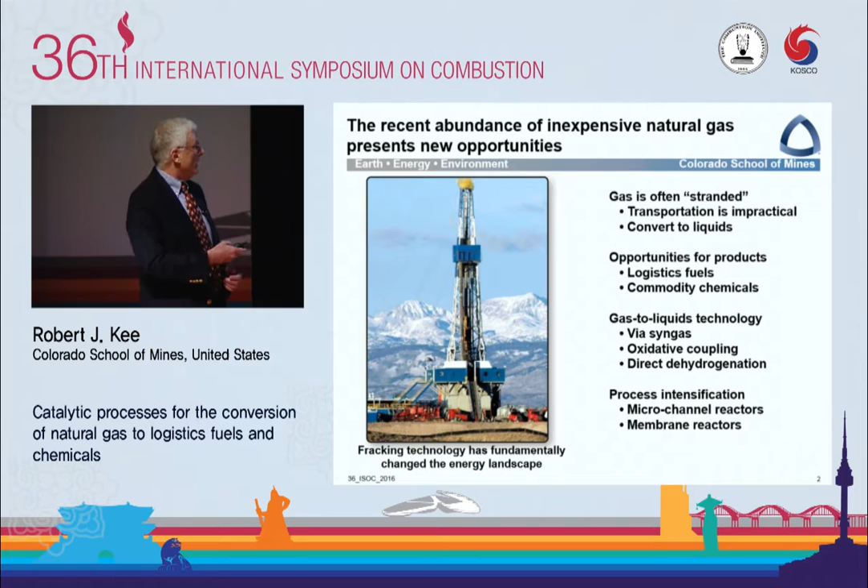As I started thinking about this talk, I wanted to set it in the context of what do we, as a combustion community, know well — actually very well compared to many other groups of engineers and scientists. I've listed a few here that I think everyone will agree with. I'm showing a relatively old picture of a turbulent flame from Godfrey Mungal's group some years ago.

This community is really very comfortable with chemical complexity — that's not always the case in other communities. Not only chemical complexity, but fluid mechanical complexity, coupled heat and mass transfer, advanced diagnostics, modeling and simulation, and the ability to scale from fundamental research to practical application. These are foundational things we're very good at as a community. Now, as I look to opportunities and things I'll talk about today, we need to build upon that foundation to extend, to do new things.

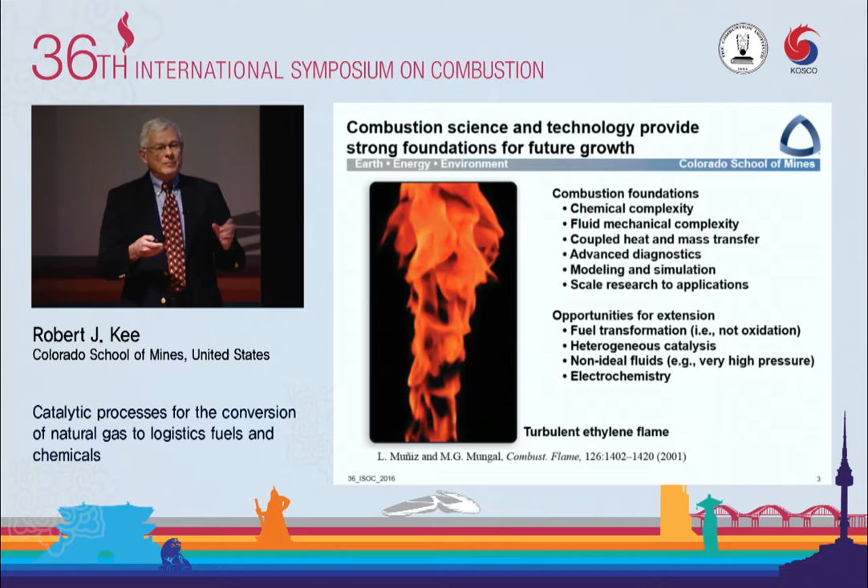So what I'll talk about today is mostly transforming fuels, not oxidizing them. They're still chemically complex, almost always operating on heterogeneous catalysis, but not always. Oftentimes we're working at high pressure, low temperature, very non-ideal fluids, supercritical sorts of behaviors. And a place I'm spending a lot of my own creative energies these days is in electrochemistry — I'll very briefly touch on that in this talk, but it's an important topic in its own right.

So here's the outline for the talk I'll give today. I'm assuming we'll start with clean natural gas — what I really mean by that is methane.

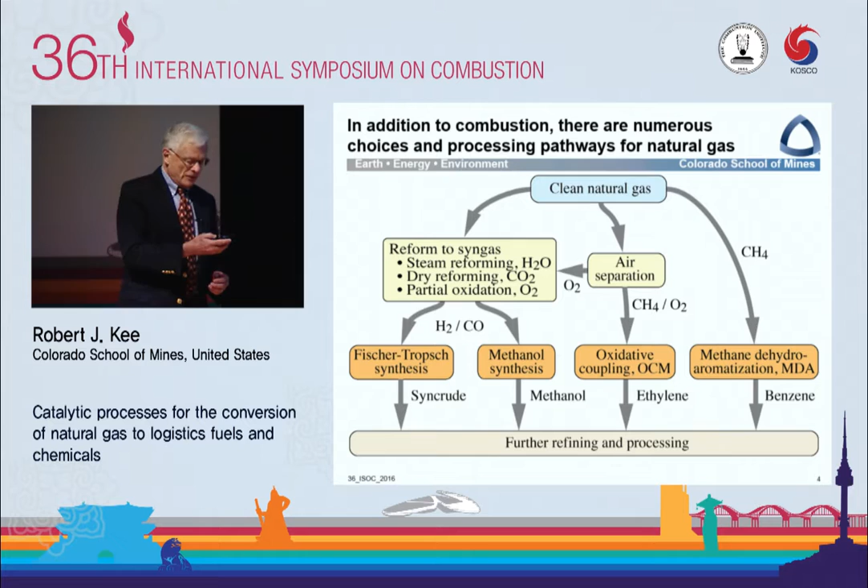There's a lot of technology to get from natural gas to methane before we go into other processing. I'll review what's largely familiar to this group about syngas, which is the most traditional way to move from methane to other fuels. I'll talk about Fischer-Tropsch in the context of process intensification. I won't say anything about methanol here, but I'll spend time on oxidative coupling and methane dehydroaromatization, leading ultimately to chemical feedstocks for downstream processing.

So let's start with syngas and reforming. I want to remind you of two important things. One is the heats of reaction—strongly endothermic for typical reforming, or reasonably exothermic for partial oxidation, with combinations that are autothermal. We're often thinking about how to manage temperature in reforming processes.

What's often less talked about is the need to produce certain hydrogen-CO ratios depending on your downstream process. For example, if you're going to a Fischer-Tropsch process, you need 2 hydrogens for every CO, but if you want to make acetic acid, you need equal parts. So attention to both process temperature, the exo-endothermicity of the chemistry, and product composition is quite important.

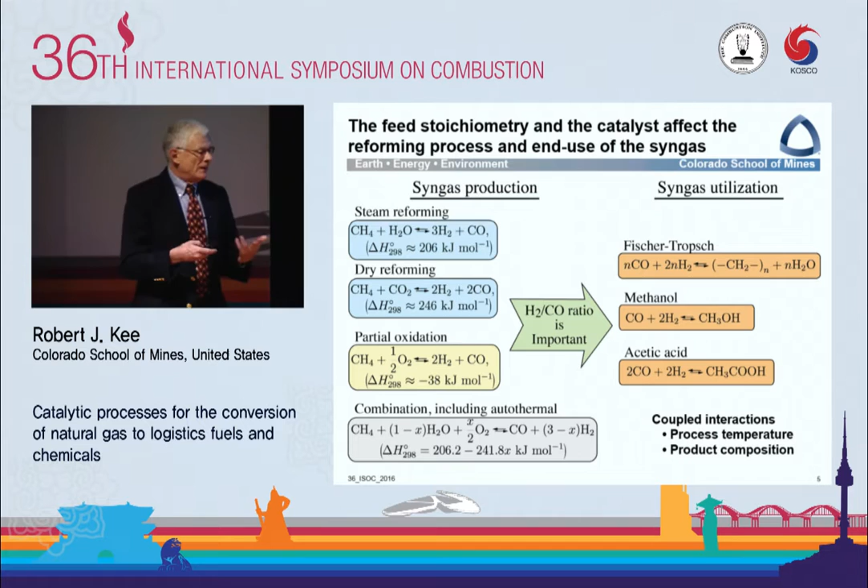One way to conceptualize that simply is shown in this ternary diagram, plotting the equilibrium reforming chemistry. There are a couple of important things shown here. One is this red line, the coke line—if we have a feed stream above this line, thermodynamically the most likely thing is to make coke or foul the catalyst, so usually we don't want to be there.

The star here—I should put an asterisk on that, because the plenary yesterday said we actually do want to be here. Anyway, the other thing shown here is iso-lines of the hydrogen-CO ratio. So as I said, depending on what you want to do with the syngas, you're concerned about coking, controlling temperature, and controlling the hydrogen-CO ratio.

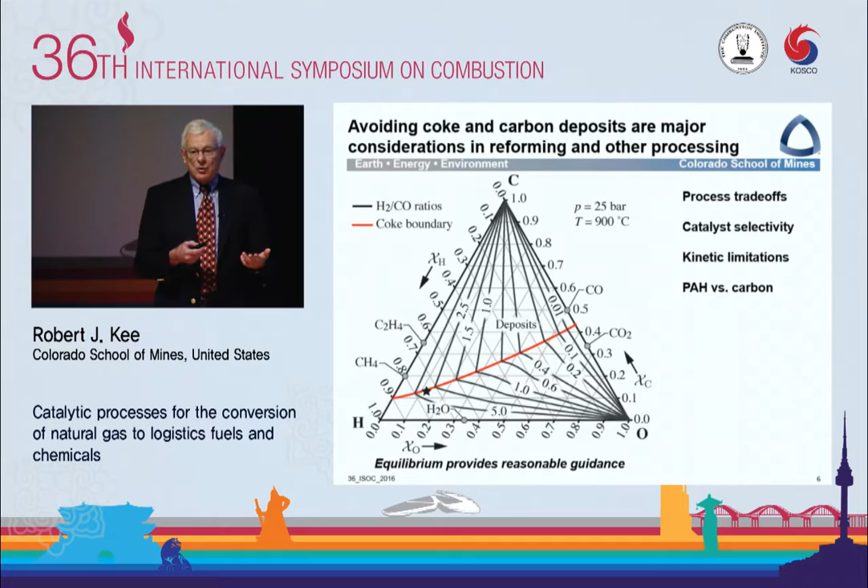Now this picture carries a lot of information, but it's at equilibrium. And as we well know, most processes are not equilibrated—we have kinetics to deal with.

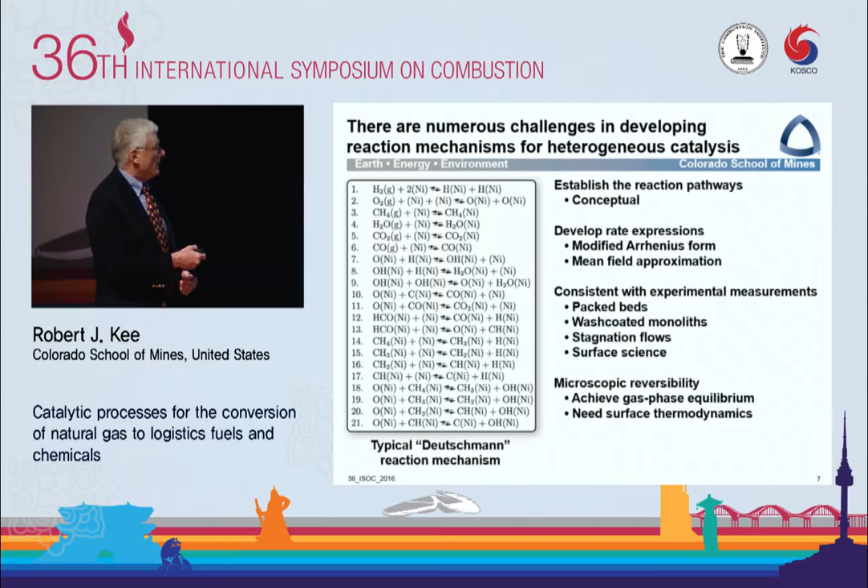I also want to call attention to a place where we need a lot of help: microscopic reversibility. In gas phase chemistry, we almost take it as given that we've got microscopically reversible reaction mechanisms, but in heterogeneous catalysis that's rarely done. The reason is you've got all these adsorbates on the surfaces, and we simply don't know the thermodynamics. So there's a lot of estimation needed, a lot of fundamental science needed to either measure—which is difficult—or predict by ab initio chemistry. I'll come back to these topics.

Okay, let me shift back to reforming. I showed a slide with autothermal reforming, dry reforming, and so on as global reactions. Here's what a typical steam reformer looks like at industrial scale. I want to call your attention to the size of a person—these are large reactors, typically producing millions of tons of hydrogen annually for ammonia synthesis, petroleum upgrading, and any number of things.

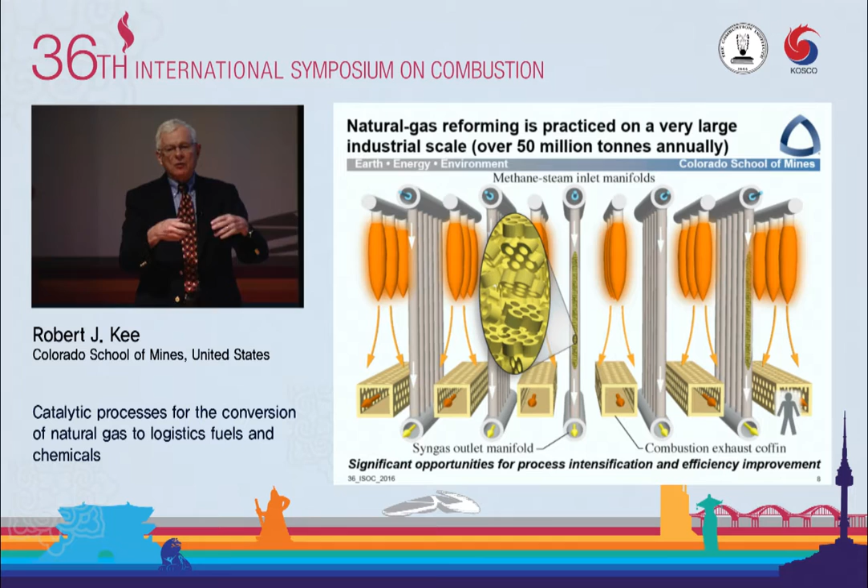Recall that steam reforming is strongly endothermic, so we need to produce heat. In this refinery reactor, we burn half of the methane simply to produce the heat. All other things being equal, that's inefficient—we burn to make the heat, to make the products we need. So we ask ourselves: can this be intensified in some way that makes that burning more efficient, or delivers the exotherms differently, rather than burning per se?

That's the spirit in which I want to talk about process intensification. In this talk, I'll discuss two broad ways to intensify. One is in microreactors—I'm holding a little ceramic reactor that I'll describe in a few minutes, including its internal structure and how it performs. The other is in membrane reactors, where we're spending a lot of time, mainly with ceramic ion transport membranes, to intensify with membranes.

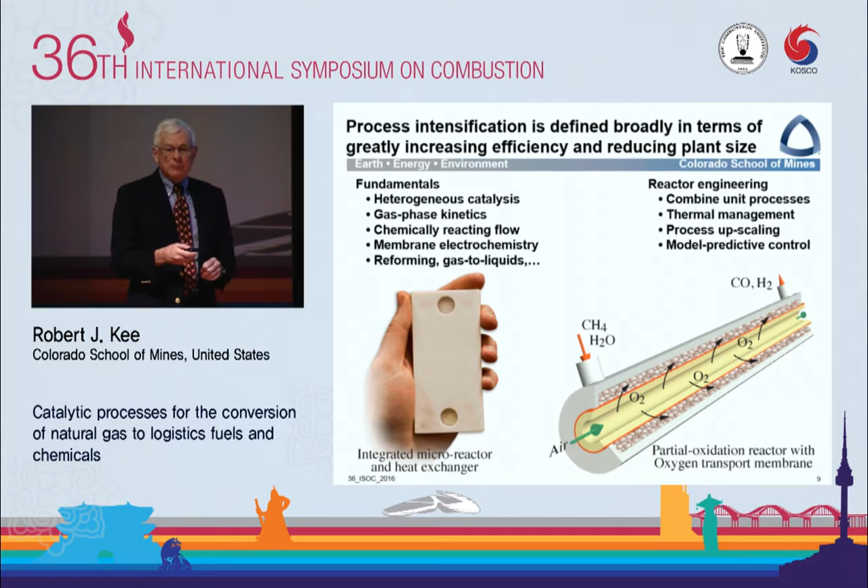In this illustration, I'm doing basically a partial oxidation, but introducing the oxygen through an oxygen transport membrane along the length of the reactor, rather than premixing at the front end. I'll talk about why that's useful as we go on.

Now, I showed a picture of a large refinery-scale reformer where I had large flames producing the heat to support the reforming endotherm. Here's one concept for integrating that in a microreactor, where microreactor means channels on the order of a millimeter or so, where we run two channels—one doing the endothermic reforming, the backing channel running an exothermic oxidation process.

So in principle, this works great. In practice, it works not quite so great, because it's very difficult to get the endotherms where you need them, the exotherms where you need them, and do the balancing and so on. But in principle, it's a good idea to closely couple exothermic and endothermic processes, as opposed to simply making a flame.

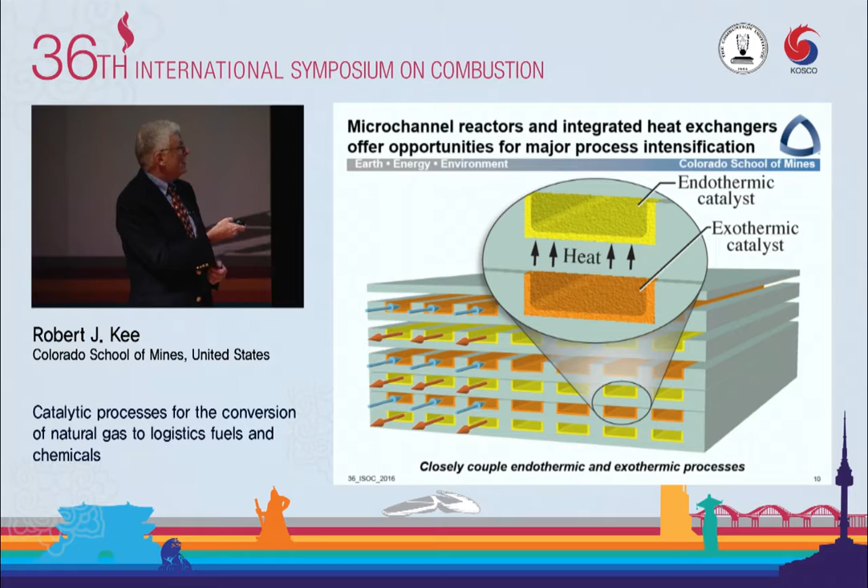Now let me take a short detour here. I've shown the catalyst as a wash coat, much like in your catalytic converter in your automobile, but you see no detail of what that looks like. So one of the things we've done recently is reconstruct the wash coats and look at the microscale of that wash coat structure.

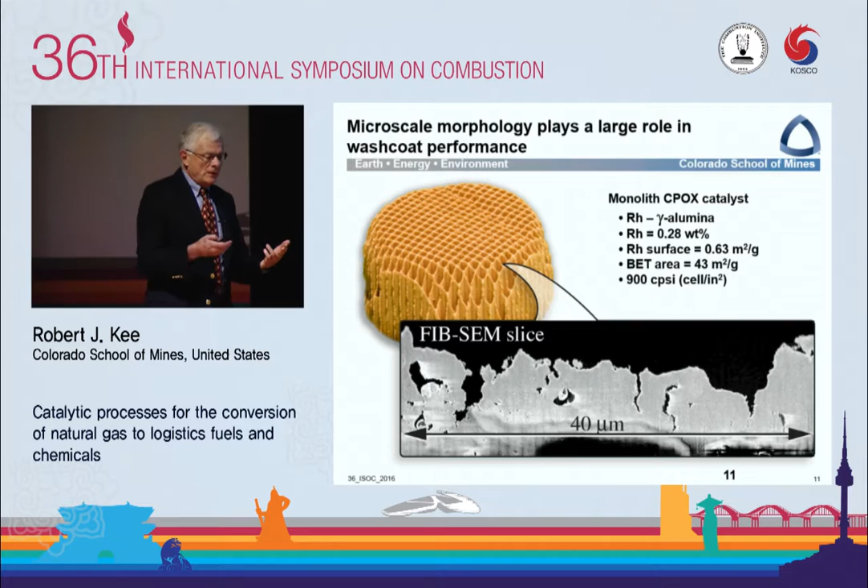This is a commercial partial oxidation catalyst that we acquired through the good graces of Olaf Deutschmann in Karlsruhe. This is a focused ion beam SEM—scanning electron microscopy—slice of a bit of this wash coat. With the FIB-SEM, we can now tomographically reconstruct the wash coat structure in whole.

So on the scale of a few tens of microns, this is what the tomographically reconstructed catalyst wash coat looks like. If you follow this literature, we often treat wash coats as collections of packed spheres or ordered holes, and come up with a Thiele modulus, this kind of thing. But when you look at the actual microstructure, you'd be hard-pressed to say that looks like a collection of packed spheres. It just doesn't.

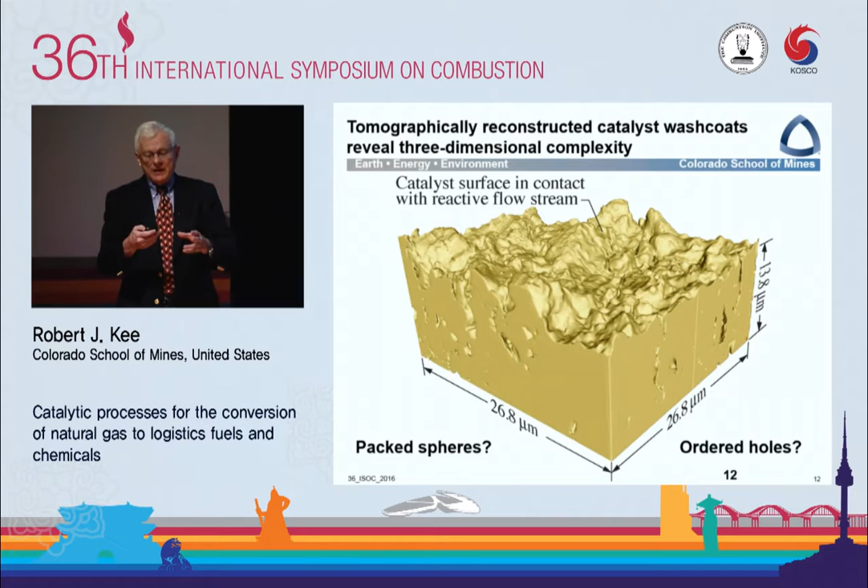So what we've done is go into these—let me call them cracks, these crevices that go into the wash coat structure—and pull those out electronically, which we can do because we have digital representations of the microstructure. From that, we do three-dimensional simulations of the reaction-diffusion trade-offs deep within these pores, or crevices.

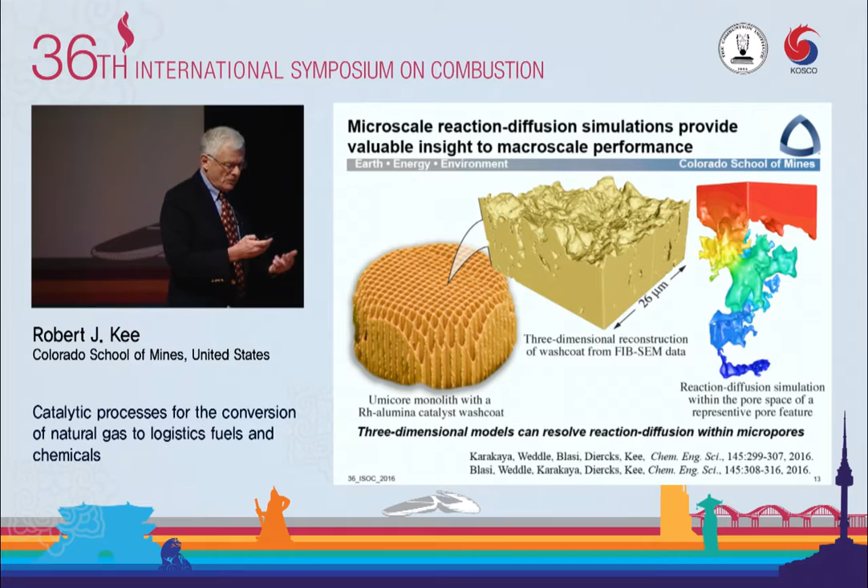In this case, we've generalized that in terms of a Damkohler number, looking at reaction-diffusion trade-offs. As you'd imagine, if the surface chemistry is slow compared to the diffusion, you get deep penetration into the cracks and use pretty much all your catalyst. If, on the other hand, the surface chemistry is fast, all the chemistry happens near the surface, and the platinum or rhodium or whatever you've put down there is actually not being used. These kinds of insights are quite important to how we optimize wash coat structures in actual catalysts.

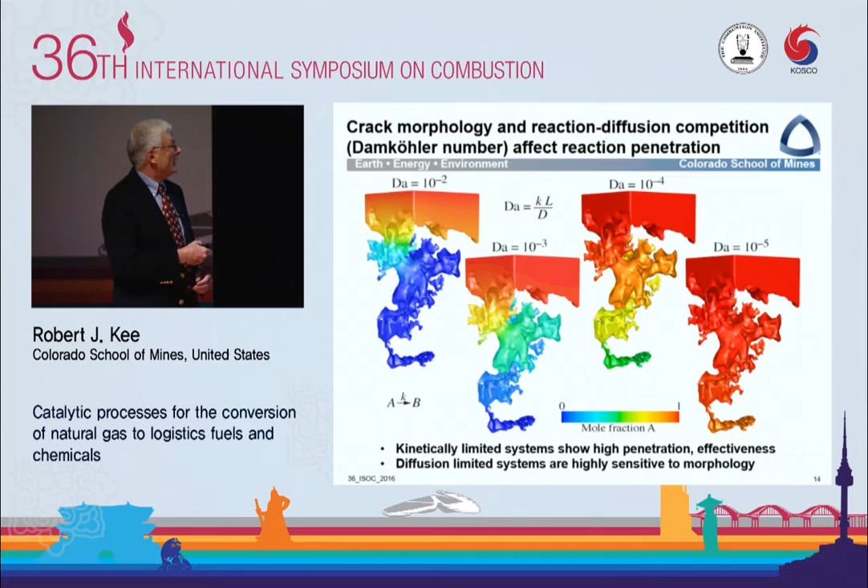Okay, let me come back to the microchannels, where in this case I haven't shown the catalyst explicitly. But as you know—there are many talks in this symposium this week about microchannel combustion and microchannel behaviors—you get very high heat and mass transfer because of the small dimensions. It's laminar flow, but very high heat and mass transfer because the Nusselt and Sherwood numbers are constant. As the length scales decrease, you get very high heat and mass transfer. So that's a good thing.

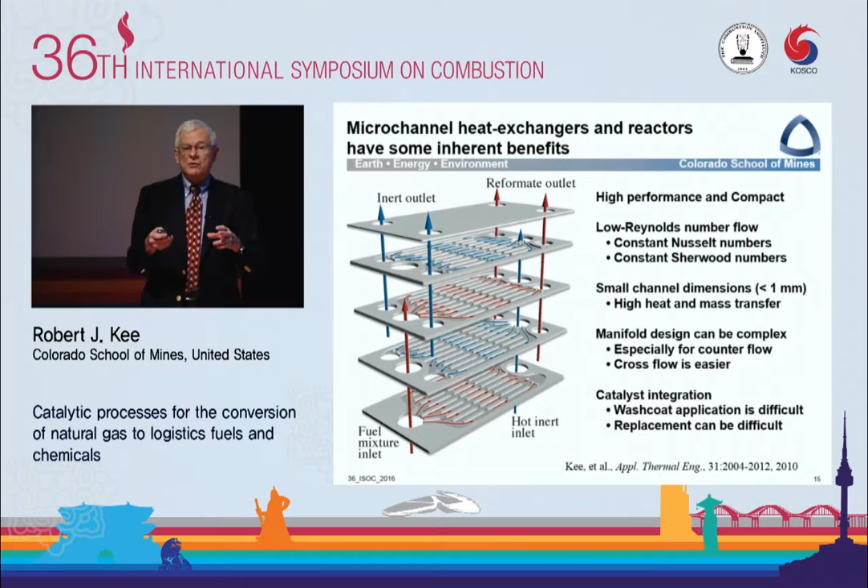So this is a reactor, and I'll show some brief results. We're making these from ceramics. Most of this technology is made from metals, which is a good thing, but we think we can get comparable performance at much lower cost with ceramics. But that's a bit of a different story.

What I'm showing here is that we've had to do some things in the design of these reactors. I'll call specific attention to these little pedestals that sit here, which fluid mechanically is actually quite a bad idea—I mean, you really wouldn't want to do that.

From a manufacturing point of view, we had to do it to get good lamination between layers. So not only do we need to be concerned with trade-offs between the chemistry, the fluid mechanics, the heat transfer, and so on, we need also to be concerned with design decisions that lead to manufacturability.

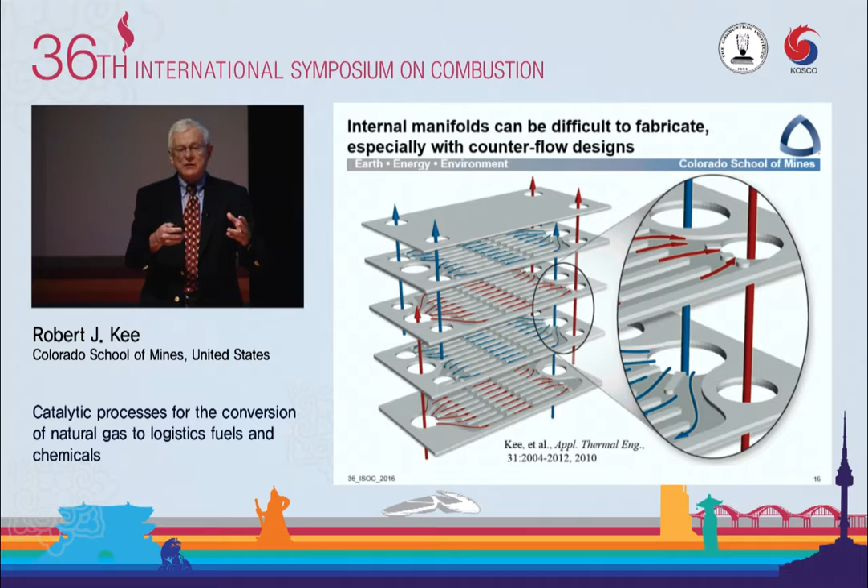So we spend a lot of effort in computational fluid mechanics dealing with heterogeneous catalysis, complexity in heterogeneous catalysis. I mean, certainly tens of reactions, typically not hundreds of reactions, fluid mechanics in the reactor bodies, and heat transfer. That's less computationally expensive than some of the DNS work done here, but it's still computationally very expensive.

We've spent a lot of time, and continue to, trying to accelerate these three-dimensional simulations. I call particular attention to recent work where we've taken the ideas from Steve Pope on ISAT, in situ adaptive tabulation, and implemented that into heterogeneous catalysis with very great accelerations. Once we've built the tables, we can solve the reacting flow problem basically at the same cost as the non-reacting flow. Very great accelerations.

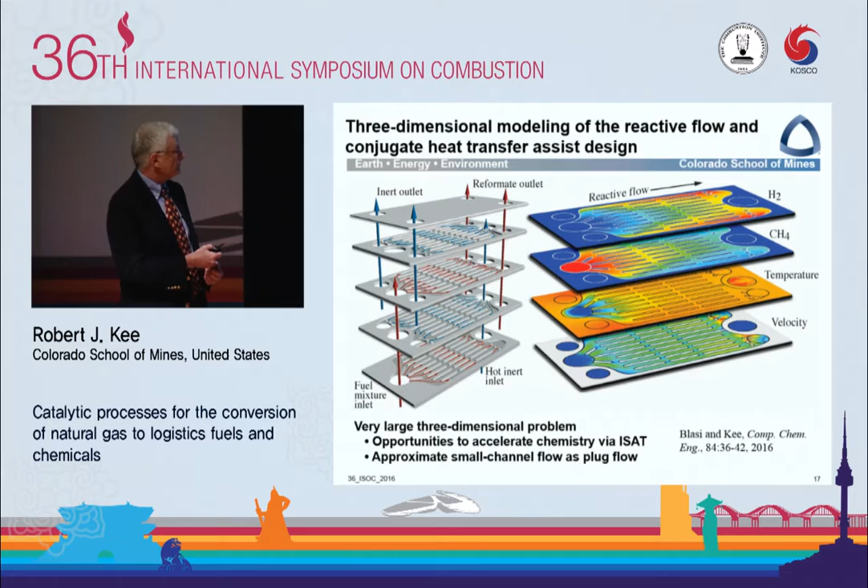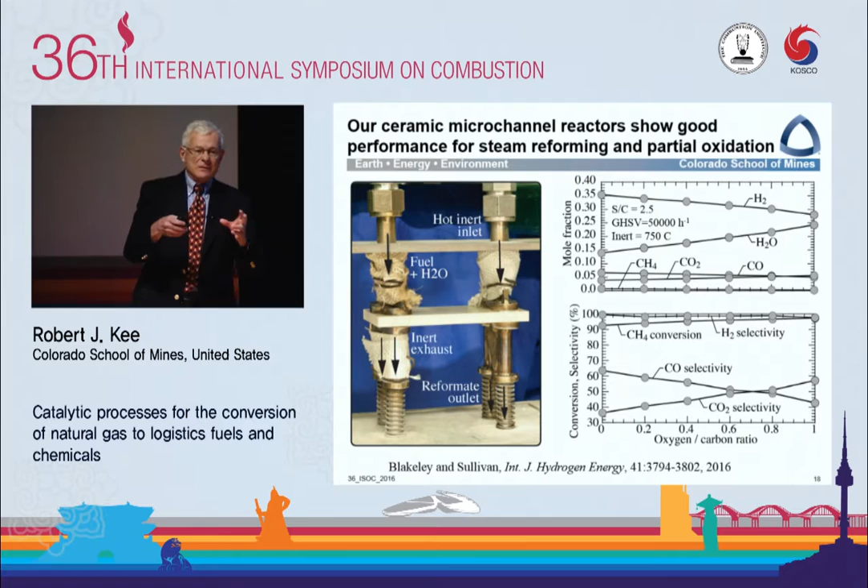Here's our reactor in a test stand, shown exposed here—normally there would be insulation around it. In this set of experiments, we're looking at the methane conversion and hydrogen selectivity as a function of oxygen-carbon ratios. We really care a lot about the oxygen-carbon ratios because we care about the chemical content of the syngas.

Okay, let me now shift our attention to membranes. Up to now, I showed a couple of reactors, but with no membranes. They were intensified by virtue of small channels, microreactors, and so on.

Look here at a typical steam reformer. Typically, we pre-mix the methane and steam beforehand. You produce a lot of hydrogen, but this reaction can equilibrate—all reactions equilibrate at some point. Once we've equilibrated, you can get no more conversion. So if we can pull out the hydrogen through a membrane, we can keep shifting this reaction to get further conversion of the methane. Palladium alloys are good hydrogen transport membranes. We work mainly on ceramic ion transport membranes, mainly of the barium zirconate, barium cerate class.

Here's basically the same configuration, catalyst in the interior body, but now let's look at a partial oxidation. If we pre-mix the methane and oxygen and feed it in, we'll get a very large exotherm right at the front end of the catalyst bed, producing a lot of total oxidation products, which will then downstream reform—inefficient if we can avoid it. So in this case, we're using oxygen ion transport membranes to introduce the oxygen just in time and thereby control the temperature. I'll show other examples of that as we go on.

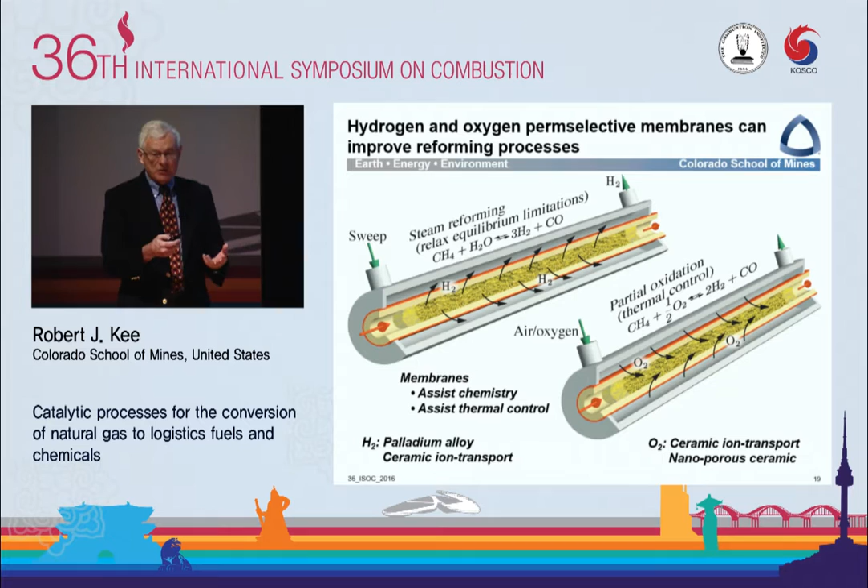In essentially all partial oxidation processes, you really want pure oxygen—you don't want to do a nitrogen separation later. So let me talk briefly about air separation, and that'll connect back into some of the membrane technology.

Here are oxygen transport membranes made mainly of things like calcium-doped lanthanum ferrite. These have been developed by Air Products primarily for oxy-combustion applications. When you look at this picture, unless you know what you're looking at, it just looks like a stack, like a loaf of bread. What is really going on?

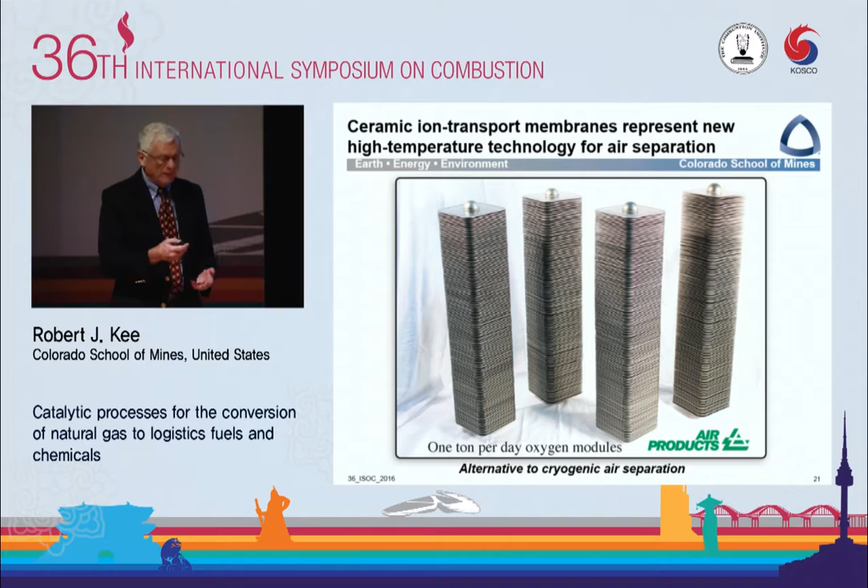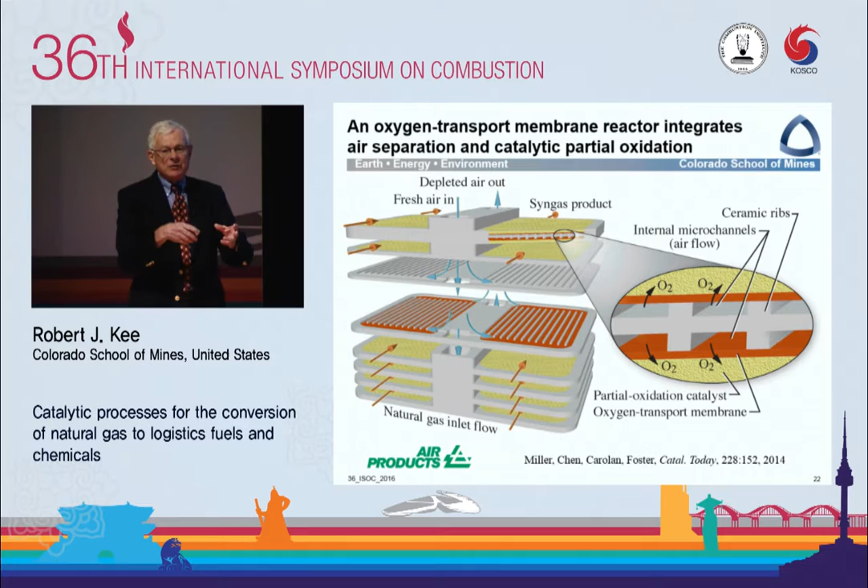In this image, I've split apart these blades, or slices of bread, to look internally, and then done one more thing—put a partial oxidation catalyst on the external surfaces of the blades. This is again a design from Air Products: they feed air through this whole stack, which goes through these small microchannels, separates the air, and produces oxygen through an ion transport membrane to the partial oxidation catalyst. So again, intensified in the sense of microchannels, in situ air separation, combining unit processes.

Here's another way this could be done. We're limited by our imagination in how to build these kinds of reactors, so I'm showing some illustrations—they exist and are worth thinking about. Here's a design that Praxair has developed.

In this case, we're coming in with steam and methane, which are fed to these endothermic reforming channels, filled with catalysts—that's endothermic. But the reaction is only partially reformed, so what comes out of these yellow-brown channels still has some methane. It comes over here and feeds partial oxidation tubes, which are complicated in their own right.

There's an oxygen reduction catalyst here, a membrane—an oxygen transport membrane—and a partial oxidation catalyst. That's exothermic, so those get red hot and radiate. Then air flows laterally across each of these blades, and there are many of those. So again, we've coupled the air separation process, a dry or steam reforming, and a partial oxidation in a way to produce syngas in a single reactor.

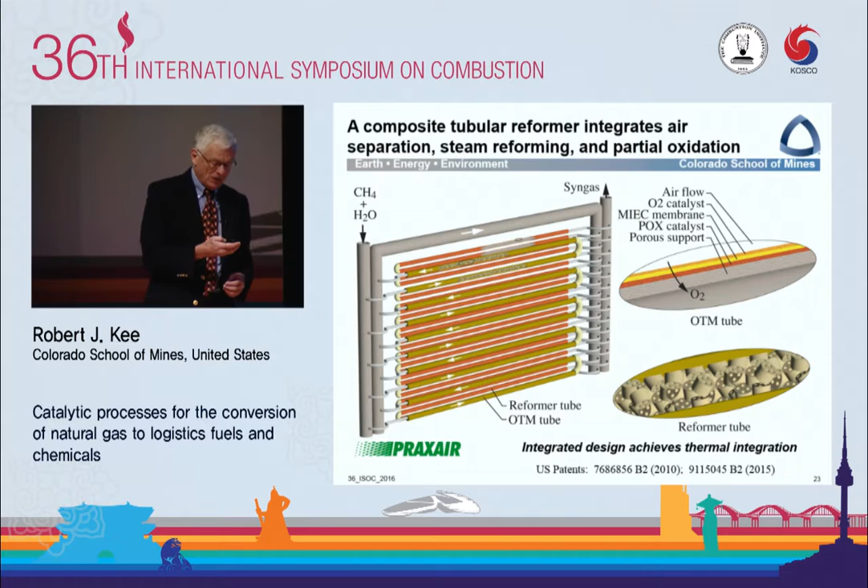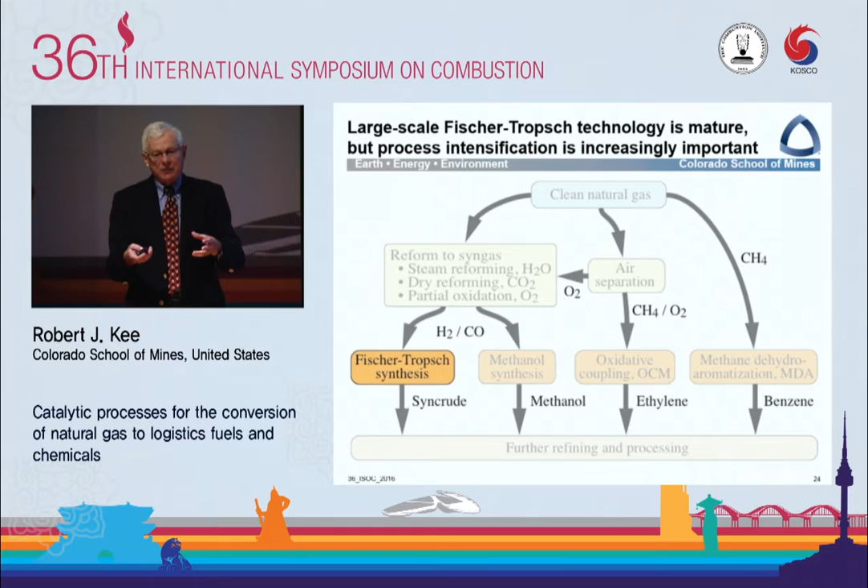Let me now turn our attention to what we can do with the syngas. There are many things we can do with it, but let's talk briefly about Fischer-Tropsch synthesis, the objective of which is to take the syngas and produce a synthetic crude, which would then go to further downstream refining.

In this technology, because the catalyst temperatures are low, 250 to 300 C, what happens is you bring in pressurized water, typically around 20 bar, and boil it. Because you can control the pressure, you can control the temperature, so you have very close coupling between the pressure and the operating temperature.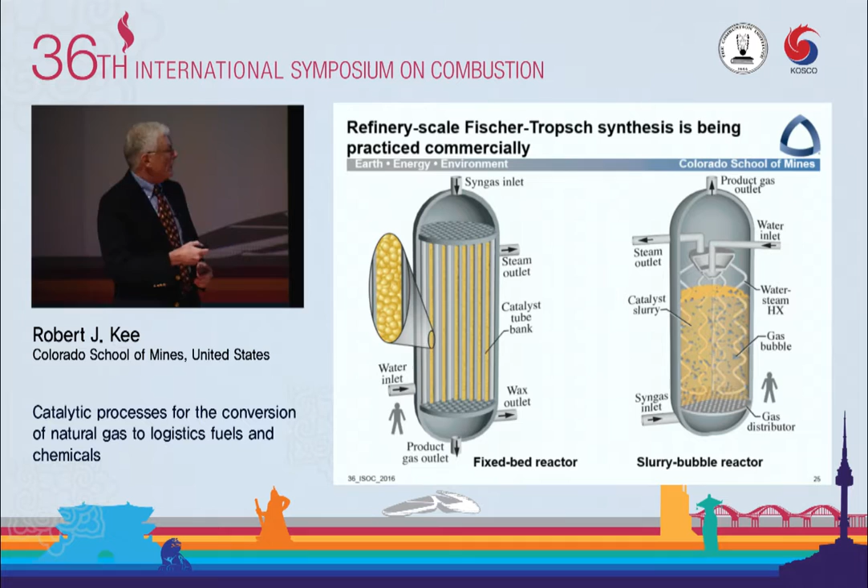But even so, these tubes are large, and so you have high temperature in the interior, low temperature on the exterior, and don't have as good a temperature uniformity as you would like. Slurry beds help a lot, but what I want to do now is call attention to what a company called Velocys is doing in their reformers and Fischer-Tropsch reactors.

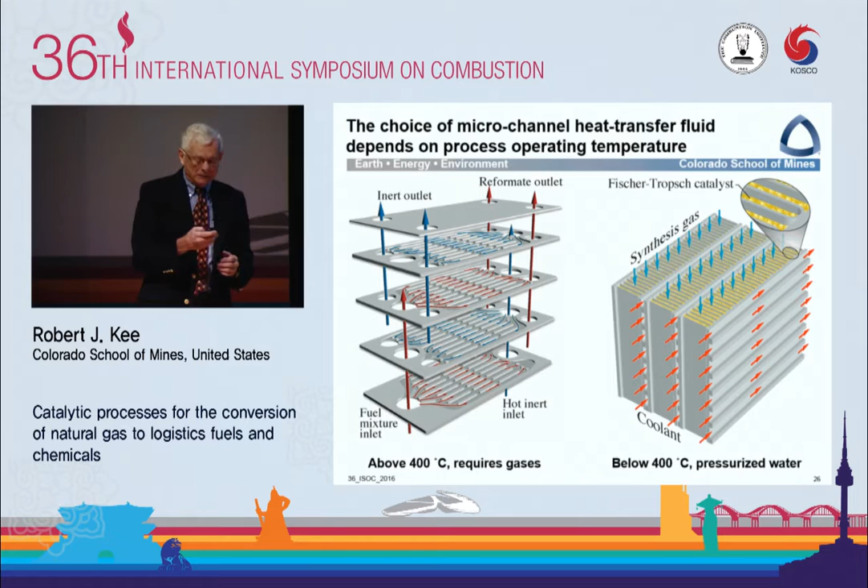Then we can take one of those cores and embed it into a meter-scale reactor, so again, highly intensified. In this case, syngas comes in the top, comes down through the catalyst, tightly coupled to the cooling water, the pressurized water, which is cross-flow. Steam comes out the top, condensed water comes out the bottom, and Fischer-Tropsch products come out the bottom.

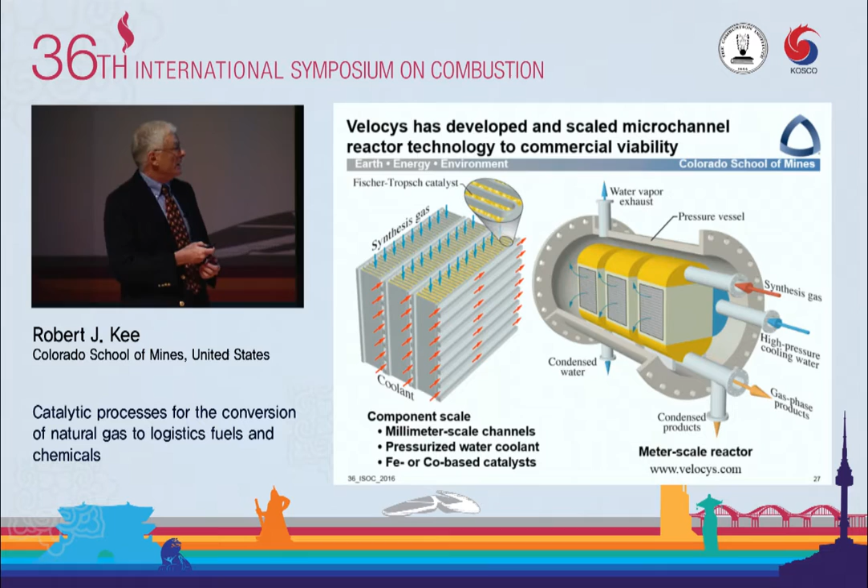So again, going from a very large refinery-scale reformer or Fischer-Tropsch reactor to something that's on the meter scale, again highly intensified. All right, let me shift gears to a slightly different topic: instead of reforming and Fischer-Tropsch, let's now try to do more direct conversion of methane to other products.

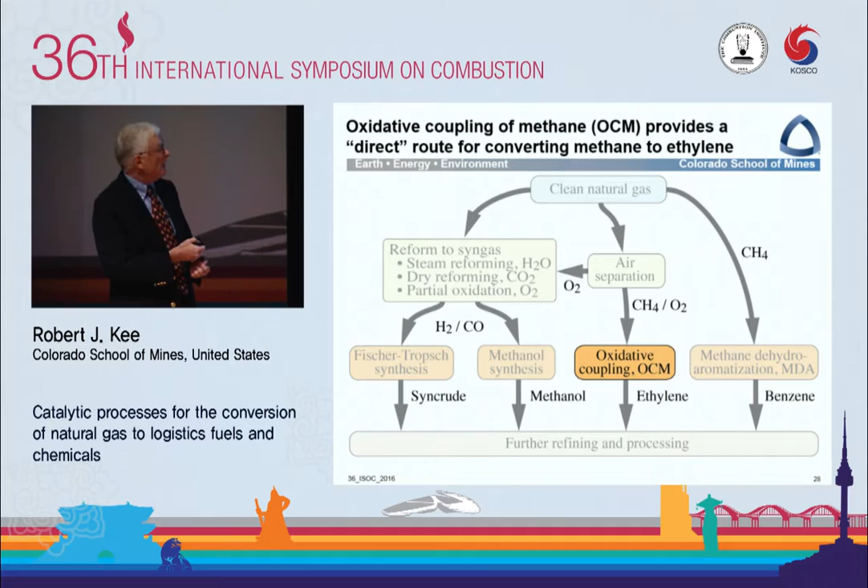I'll spend a few minutes talking about oxidative coupling of methane, a relatively old topic that has still not achieved commercial success. Here in cartoon form illustrates the oxidative coupling process.

We begin with methane and oxygen, with great excesses of methane. In other words, we're really trying to do a dehydrogenation, not an oxidation. But both on the catalyst surface and in the gas phase, the initial objective is to activate the methane to produce methyl. If we've got lots of methyls, they can recombine to ethane, and then subsequent dehydrogenation with the objective of producing ethylene, which is a very large commodity chemical with great value.

This process was first put forward in 1982, with a lot of work up till now. A company called Siluria, in the California Bay Area, says they have either commercialized or are very close to commercializing this process.

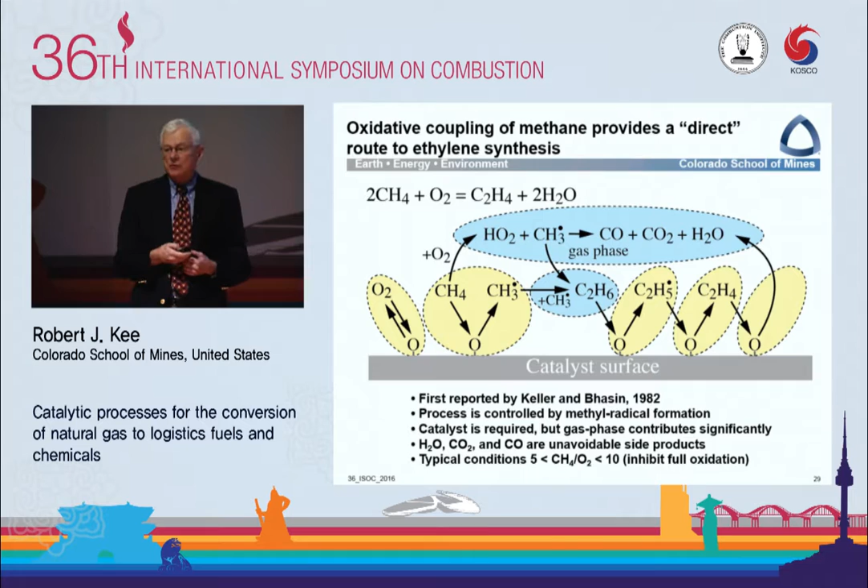Anyway, with oxidative coupling in mind, I want to come back to the catalyst. I showed a nickel reforming mechanism from Olaf Deutschmann, and this community is reasonably comfortable with rhodium, platinum, nickel single-metal catalysts. Those are very valuable and used quite widely, but not in processes such as this one.

In oxidative coupling, there are really two choices being pretty actively pursued: one is a sodium tungstate silica catalyst, where the silica is in a cristobalite form, or a lanthanum oxide, typically doped with ceria or calcia. Just by looking at the pictures, it's obvious these are more complicated catalysts than a 1,1,1 surface of rhodium or something like that.

In this literature, almost all the modeling uses a reaction mechanism coming from a group in Germany. But notice that despite these being complicated catalysts, the only species in this reaction mechanism are gas phase - there are no surface adsorbates at all. It's all gas phase. So when you look at the rate expressions for these reactions, they don't look at all like mass action kinetics. They're very complicated empirical relationships developed to predict measurements, but are highly empirical.

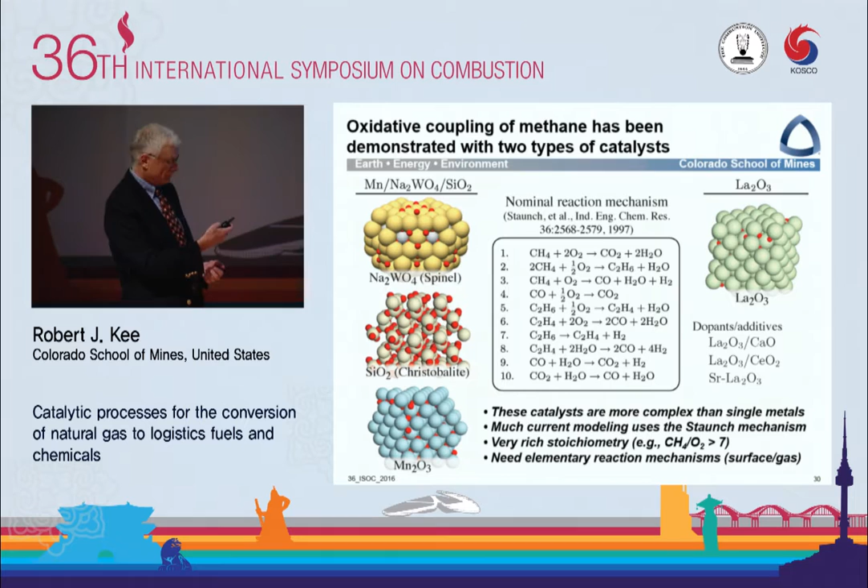The oxidative coupling is exothermic, but if you let the exotherm run and go to high temperature, then you make too many total oxidation products, and it's an inefficient process. So we're quite concerned with controlling the temperature.

Here's a reactor coming in with methane and oxygen onto the catalyst bed. This is work from Selim Senkan at UCLA. Some of the older among us may remember Selim Senkan was actually active in this community many years ago and then took a detour into catalysis and never came back.

What he measures with movable probes within this reactor bed is, first of all, a very strong exotherm within a few millimeters. So you put methane and oxygen onto this catalyst, it burns, for lack of a better word. You don't want that to happen. You really want the temperature to be low and thereby prefer the desired product, which is ethylene.

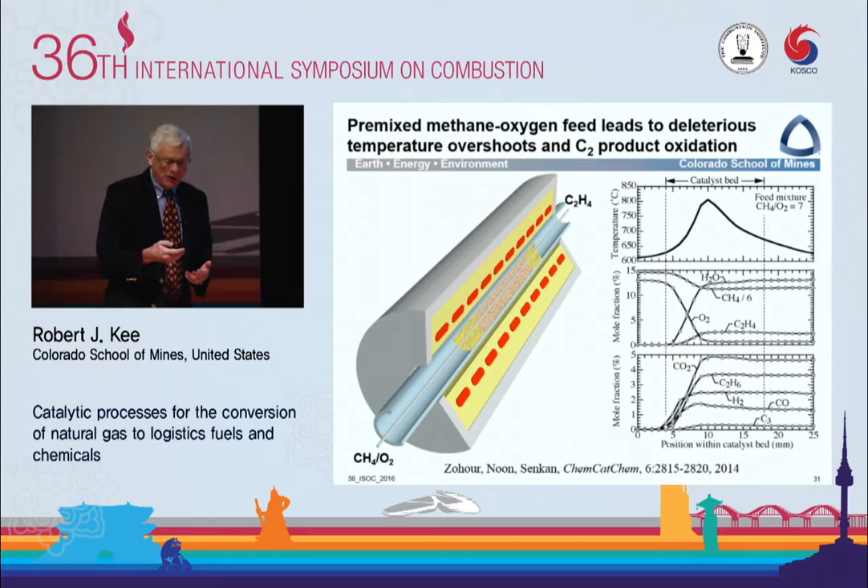So one of the things Selim did is say, okay, why put all the oxygen in at the first place? Let's make a two-stage catalyst. We put some of the oxygen in at the outset, and then we inject some later. And what you get is two peaks, but less exotherm than if it was all mixed in the first place.

Well, then it begs the question, how about 3, 5? How about making a membrane? Okay, so we'll go there in a minute.

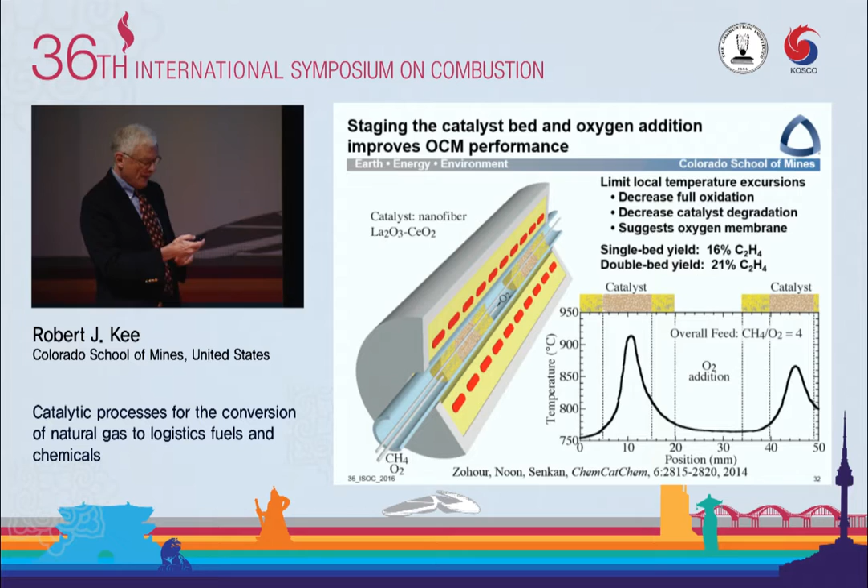But with these kinds of things in mind, here's a different kind of reactor that has been put forward by the group of Guy Marin at the University of Ghent in Belgium, coupled with a German group in Berlin. The wiring diagram here takes a minute to get your arms around, but let's break the catalyst into two reacting streams. So here's the oxidative coupling reactor, which remember is exothermic.

But we need to provide some way to cool that. We need to keep that cool, or the product streams to be cool. So let's run another process, which is a dry reformer, which is now endothermic. And in between these two processes, where the process streams never mix, we only exchange heat between the two process streams, we have a microchannel heat exchanger.

So the gas comes out of this reactor a little bit hot, goes through this counterflow heat exchanger, and heats the reaction stream going into the dry reformer, which is now going to cool. And then do it again, and do it again.

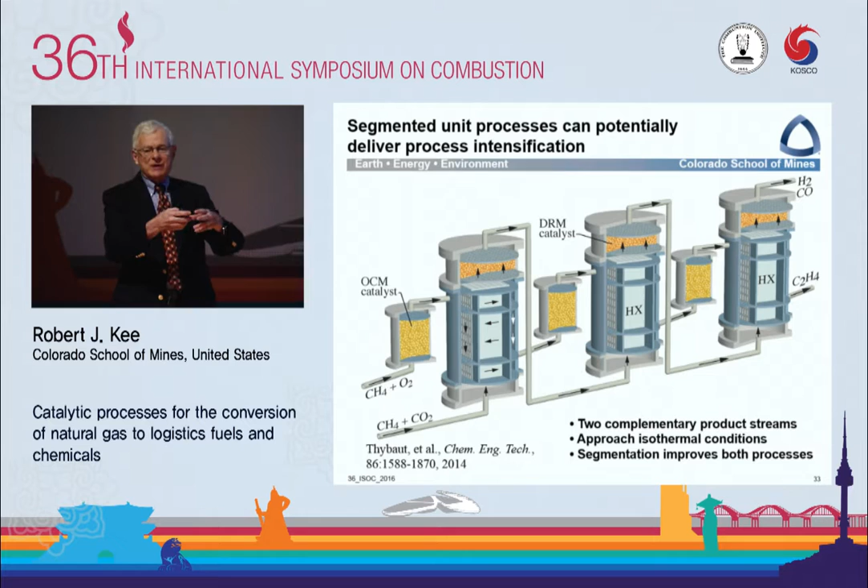So can we combine processes? That gives me two valuable product streams. Now, by many definitions of process intensification, you would say, wait a minute, that didn't combine unit processes. I actually made lots of unit processes. So on the face of it, you think, well, maybe that's not a good idea. I think it is a good idea. But then I think, do we have precedents for that, for expanding unit processes?

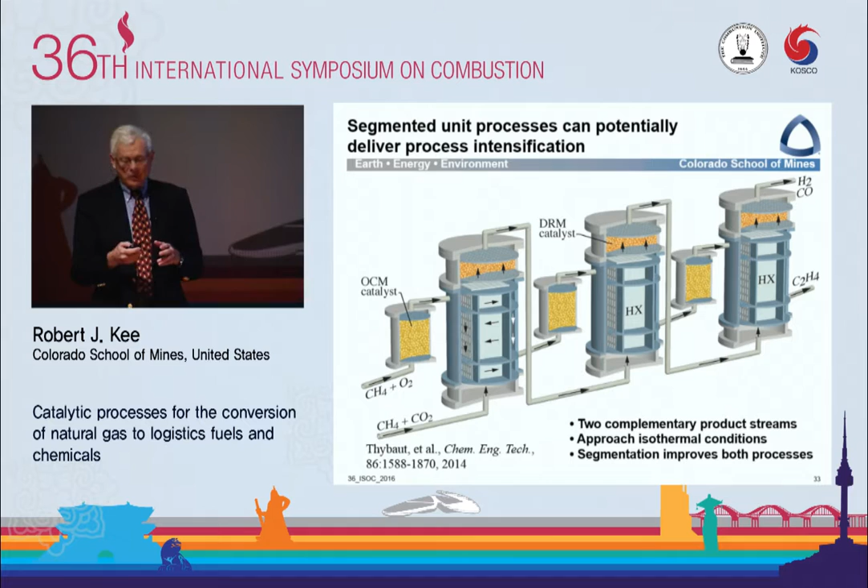And actually, in combustion, I expect this to be quite familiar here, but in gas turbines, it's actually efficient to have intercooling between compressor stages and make-up heat or reheat combustors between expansion stages. The reason to do that is to turn what would initially be a Brayton cycle into an Ericsson cycle. And if I do this with many stages, we'll get a sawtooth behavior that makes the compression and the expansion look more or less isothermal.

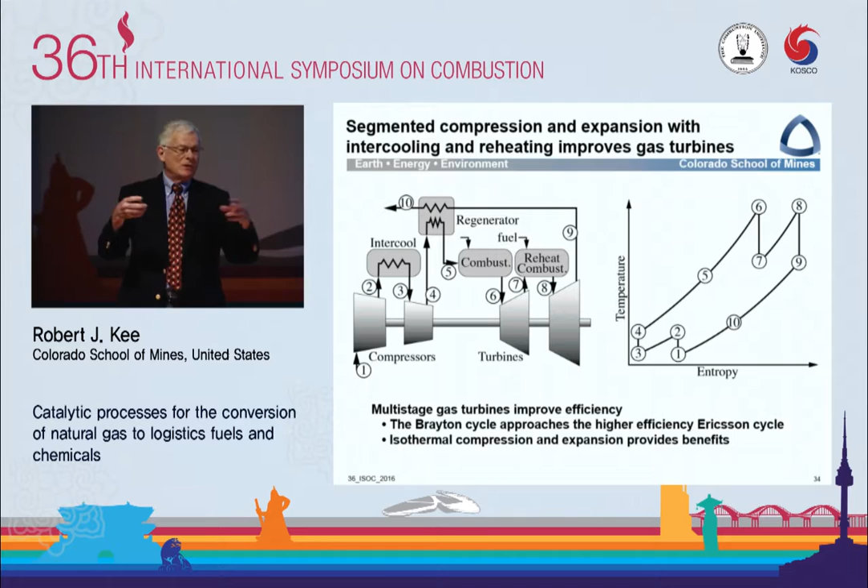So it's only an illustration to say that process intensification doesn't necessarily mean combining unit processes. There may be reasons to expand unit processes if we do it in an intelligent way.

Let me give another example, again, will be very familiar in combustion. Everybody's very, I mean, there's certainly not a single person in this room that's not quite familiar with opposed flow flames of various sorts. Here's just a cartoon image that shows, despite the fact that we have a two-dimensional flow field, the temperature and composition fields are flat.

Here I've taken a photo from Kal Seshadri's lab just to show that, in fact, that's what happens if you set it up correctly.

I've shown lots of examples of tubes with catalysts in the tubes and flow through the tubes. So what I'm showing here is a tubular flame coming from the group of Satoru Ishizuka in Hiroshima, and actually this image was taken by Professor Balushi, who's also in this meeting today. By analogy with the flatness of this flat flame, in the tubular flame, even though we have long axial tubes, the flame radius is independent of axial position, if you set it up correctly, and that can be done.

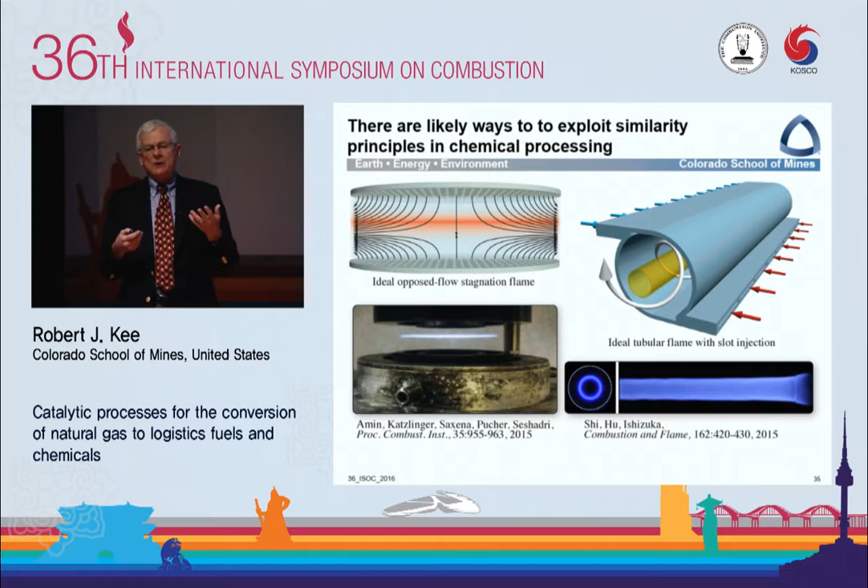So it comes to my mind, can we use that concept to build a reactor? Here's a notional image, which has not been built, might work, might not work, but at least it's interesting, where instead of having flow along the catalyst bed, where I can have exotherms, endotherms, things change along the length of the bed, if I make a reactor like this, I can do a number of things at once.

One is, let's put air in a central body, an oxygen transport membrane that delivers only oxygen, leaving the nitrogen here, onto the catalyst bed, and then swirl in the methane on the outside.

So if we could build this reactor, what we could say for sure, because we understand the mathematics of the similarity, is right the way along the length of this tube, everything will happen the same, independent of the axial position. That's a good thing. Now, we have to design it in such a way that the right thing happens independent of the length. But this is a very, very different concept that, as far as I know, nobody's even thinking about in the reactor engineering community, and might even work.

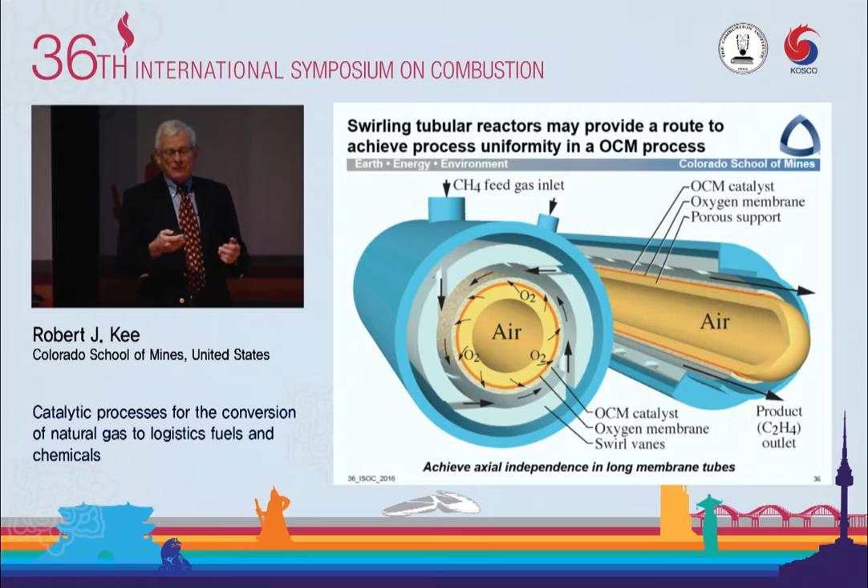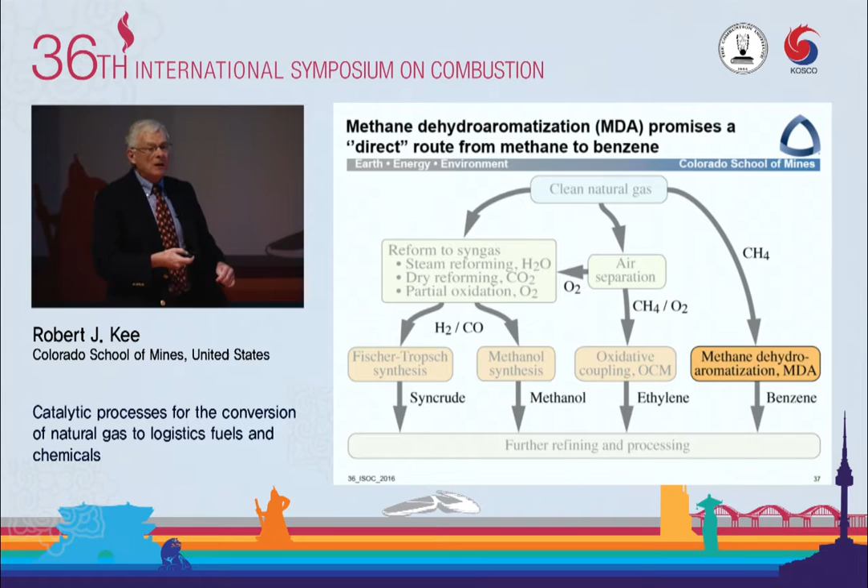Okay, let me close with a few comments about methane dehydroaromatization. In this process, in MDA, our objective is to directly dehydrogenate methane to produce benzene and hydrogen. And of course, we can easily write this reaction down and balance it and hope that it actually works.

The problem is, and I'll say more about this in just a minute, even though I can write this reaction down, the thermodynamics actually doesn't want to do this. It wants to make benzene, but then it wants to continue molecular weight growth to naphthalene, anthracene, and so on, which is what we don't want. So we need a way to interrupt that.

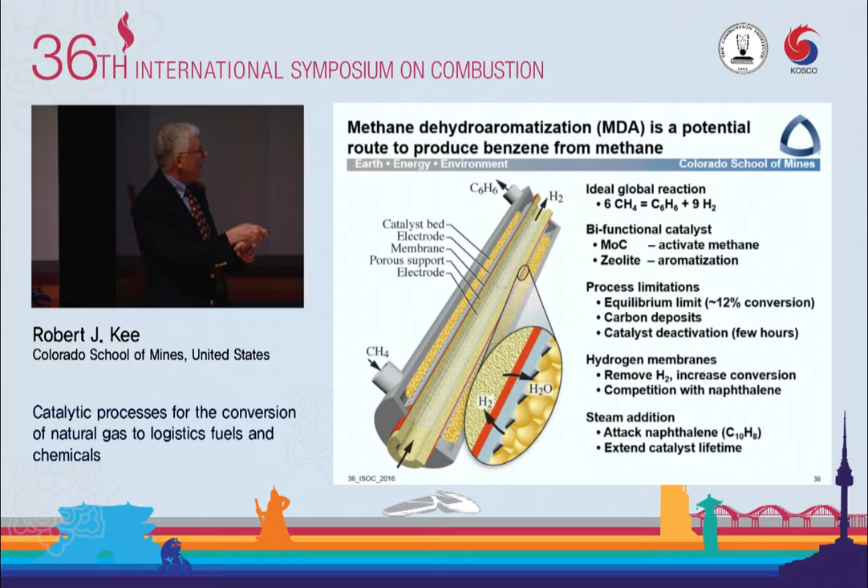One of the ways to do that, that's actually quite active in our group now, is to use low levels of steam to preferentially attack the naphthalene, and we're doing that through mixed conductor membranes. Again, these are solid solutions of barium zirconates, barium cerates that have the property that they can move oxygen ions and protons. So by polarizing this membrane, we can move hydrogen in one direction and essentially move steam in the other direction.

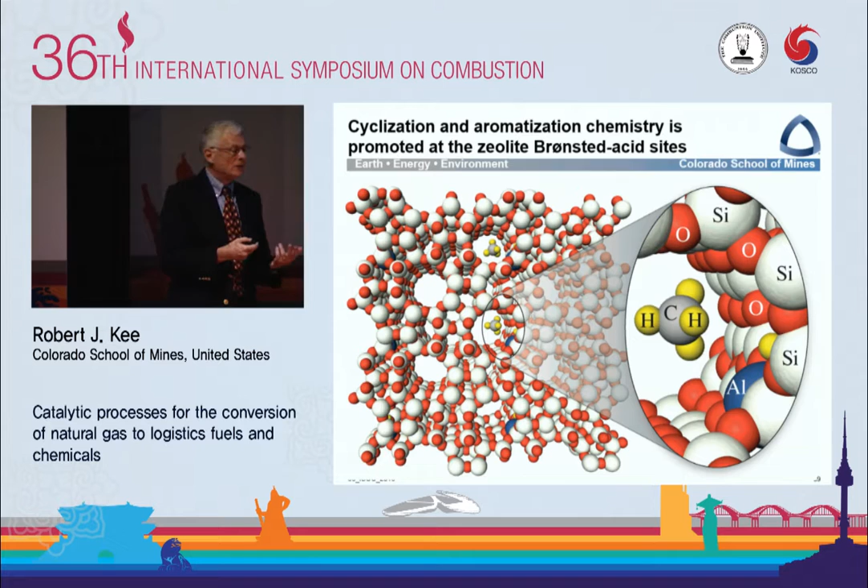Okay, now how do we get a reaction mechanism? I said at the outset, the easiest thing to do is click on detchem.com, and then it just appears. But I just say that tongue-in-cheek. That works if you want to look at catalysis on rhodium or nickel or something like that. But if you want to look at a bifunctional molybdenum carbide zeolite, there's no place to click and get it. You have to figure it out. And so we're working hard on that.

And when I say we, that means my colleague Canan Karakaya, who by the way was a student with Olaf, so that actually is connected to build these mechanisms.

So the first place you start is with a mind's eye picture. And this mind's eye picture was published a couple of years ago by the group of Guy Marin, I mentioned earlier, from Ghent. They laid it out in a notional picture: we're going to activate the methane on the molybdenum carbide, transfer some of the ethylene onto the zeolite, undergo a series of oligomerization reactions, protonation, deprotonation, ultimately cyclize into cyclohexane, protonation, deprotonation to make benzene.

Now we want to stop here. I mean, we want benzene as a product, but the thermodynamics doesn't want to stop here. The thermodynamics wants to go on and make naphthalene and anthracene and higher aromatics.

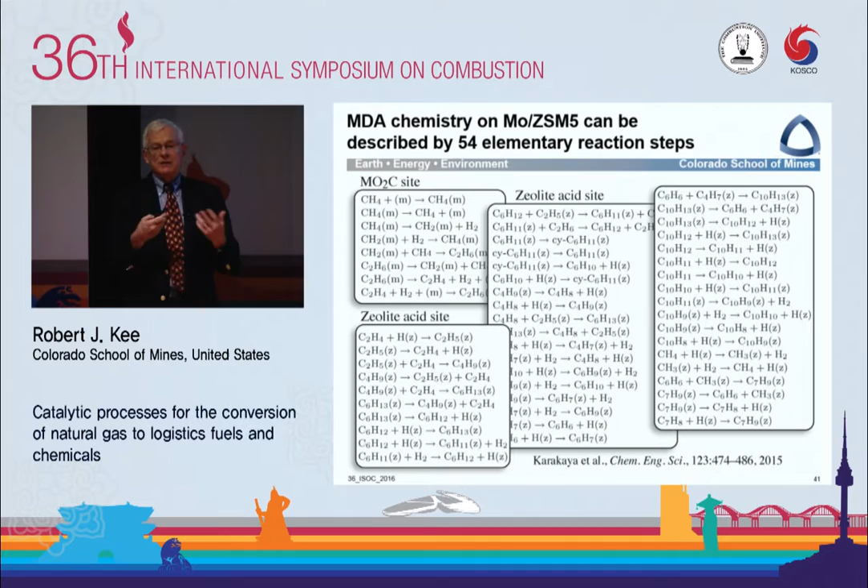Coming up with rate expressions is difficult. We've got to respect thermodynamics. We've got to be consistent with experiments, which we're doing. We're working a lot with the University of Oslo chemistry department who are doing experiments. So there's a lot of day-to-day iteration to come up with a reaction mechanism that represents what we can actually measure in the laboratory.

Yeah, I alluded to this a few minutes ago. What happens through these membranes as you take more and more hydrogen off the catalyst, well, if you start with methane and remove all the hydrogen, that's obvious what you get. You get carbon, right? I mean, that's obvious. But in fact, you don't go all the way to carbon typically.

And as you remove more and more hydrogen, then the naphthalene yield competes with the desired benzene yield. We continue converting, but to the wrong products.

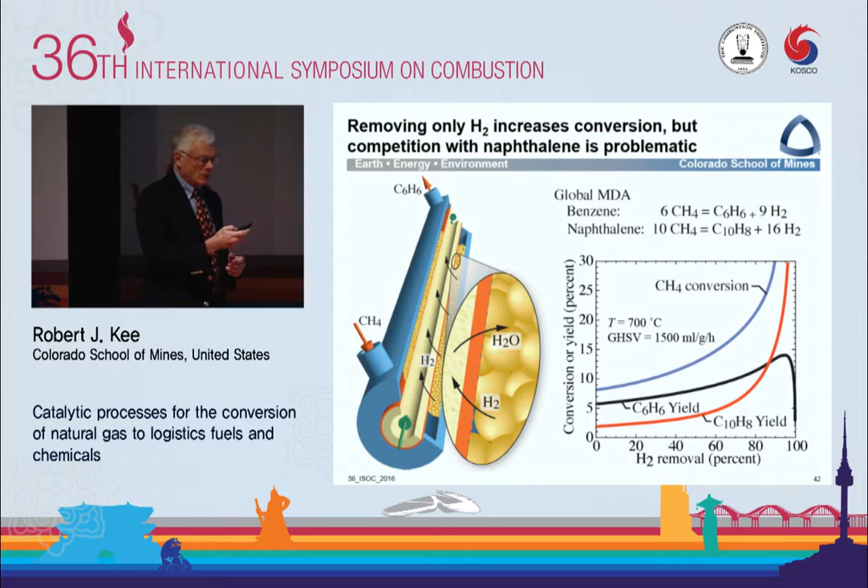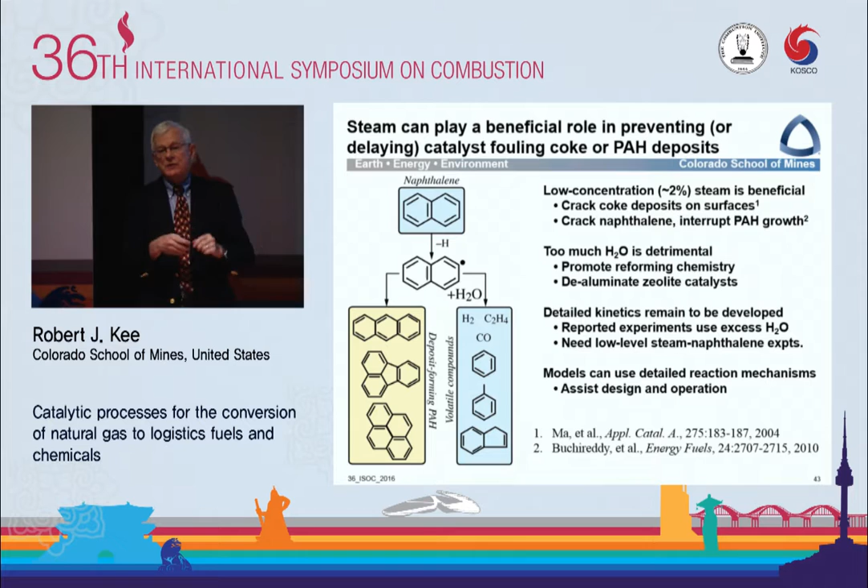So the thing that we're working on actually quite actively now is the chemistry, again, on these zeolite, these molybdenum carbide zeolite catalysts, but the ability of a little bit of steam, not a lot, 2% steam, to preferentially attack the naphthalene and come back to ethylene and other smaller products. That concept in itself is not new in the chemical processing literature, but the ability to do this with catalysts, with membranes that can move protons and oxygen ions, is in fact new.

Okay, I want to close here with a few very quick comments about membranes, which I've mentioned in a number of contexts. I showed this image earlier, but in this case, I need a hydrogen transport membrane. Typically, that's a palladium or palladium alloy or a proton-conducting ceramic, usually a doped perovskite, barium cerate kind of material. For oxygen transport membranes, we've got more choices.

Many of you who work on solid oxide fuel cells know very well that yttrium-doped zirconia is a good oxygen transport membrane. Doped ceria is as well. But those need to be polarized. In other words, you need electrodes to drive the ions.

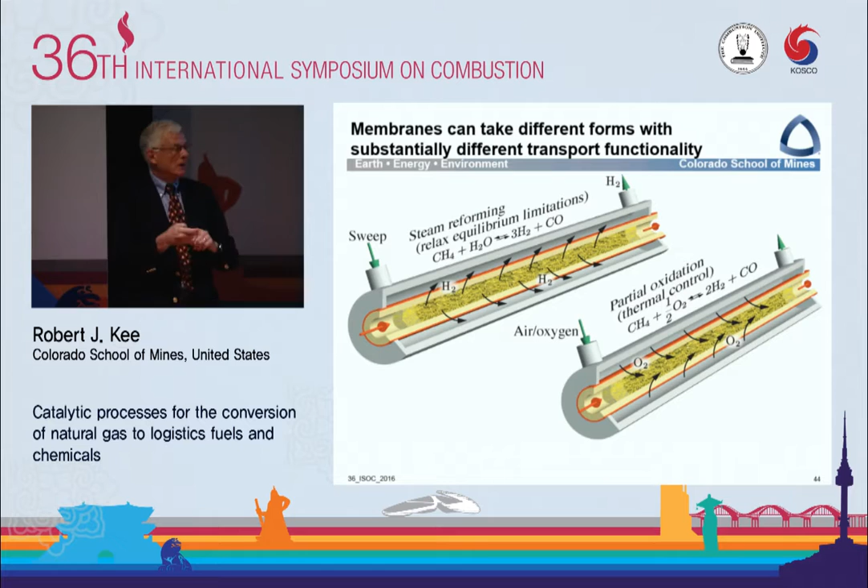Doped ceria has two mobile defects. One is the oxygen ion, and the other is a reduced ceria. It's not electronically conductive, so to move the ions, you have to polarize it. That also means you can make a fuel cell, and people do make fuel cells out of ceria electrolytes.

Yttrium-stabilized zirconia, again, that's much more known in this community because of solid oxide fuel cell technology. It's essentially a pure oxygen ion conductor. In oxidative coupling, there's a fair bit of work using nanoporous alumina. Now, that's not perm-selective, but if you can control partial pressures, these can be effective, and they're cheap. So there's trade-offs there.

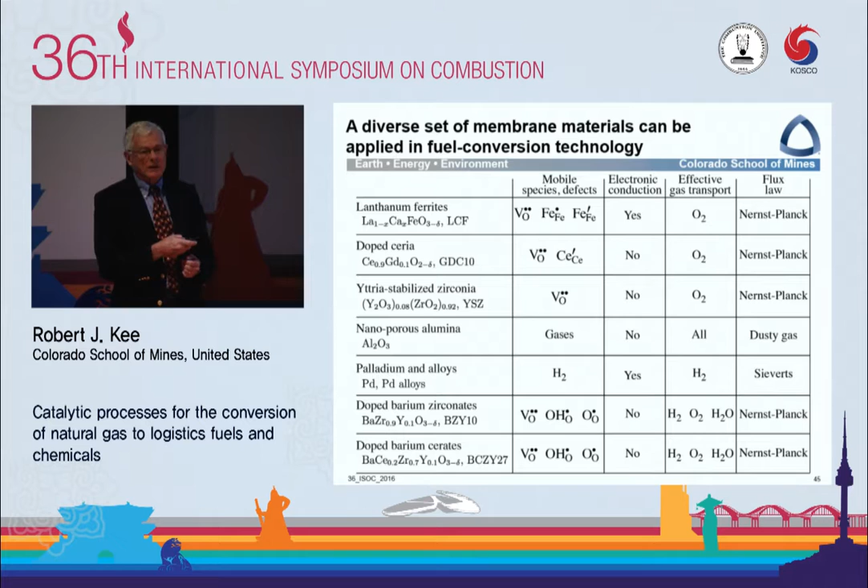Again, unless you're familiar with Kroger-Vink notation, this might not look like a proton to you, and this may not look like an oxygen ion, but that's what the nomenclature says. We think, it's a little bit controversial, but there's some discussion in the literature. We think that the charge compensation in these materials is by a small polaron that's associated with the oxygen anion in this lattice.